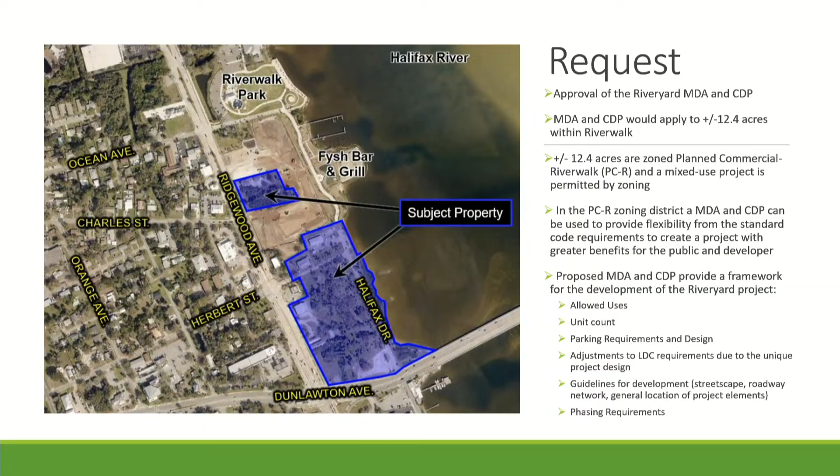What this project outlines in the master development agreement, shown in the concept plan, is a number of components. The main ones are the waterfront trail, a waterfront public park between the road and the Halifax River, up to 30,000 square feet of commercial space in multiple buildings, a multifamily structure, and a parking garage. That parking garage would be wrapped around by the multifamily building to help conceal it from all roadway points of view. Typically with projects you see 2 to 3 sides of an architecturally compatible building, then the back end of a parking garage. In this case, all sides will have screening concealing that parking garage.

There are also proposals for a marina in the future. The MDA outlines these uses, and the concept plan shows a general location for them. As we get to the site plan, there may be slight modifications, but generally those are the locations where we'll find the commercial, the multifamily, and the park.

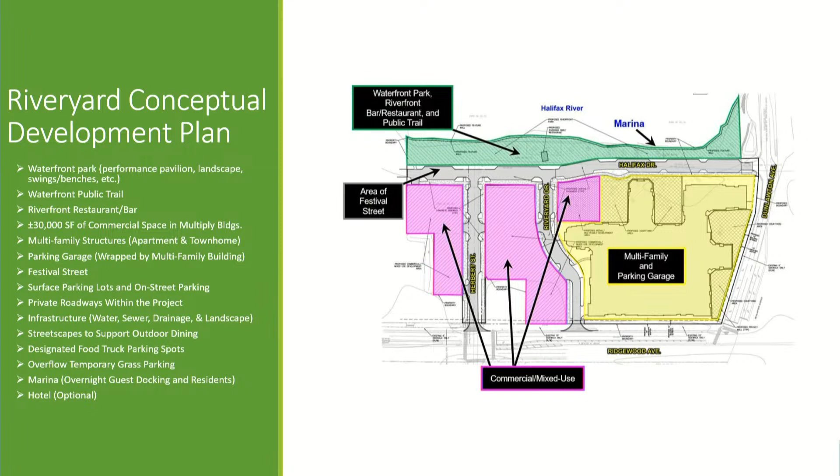It also establishes phasing for this project, as most of our MDAs do. The first phase will consist of about 20,000 square feet of building space to support restaurants and retail uses, plus the necessary parking to support those uses, depending on the square footage provided—that parking could be a combination of surface, garage, and/or street parking. It'll include the private road network of Halifax, Herbert, and what we're calling Riveryard Drive, along with the Festival Street located between the retail buildings.

The Waterfront Park and Trail, a riverfront bar and restaurant identified on the screen right along the river, and the necessary site infrastructure to support those uses—utilities, stormwater, landscape buffer, etc. The agreement also indicates when this phase is due to be completed; the maximum time frame is set at 48 months.

Throughout practicing today, I said 48 days. I told myself I wasn't going to say that, and I screwed up and said it anyway.

So, 48 months from the closing date of the current sales agreement puts it at essentially March 2028. Charles will mention he wants it done a lot quicker than we want it done, so we see that as the maximum time frame, but we'll all be working toward getting it done even sooner.

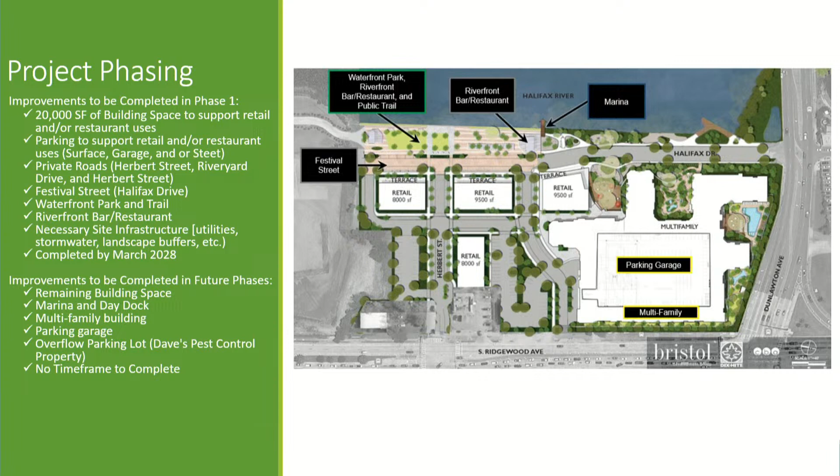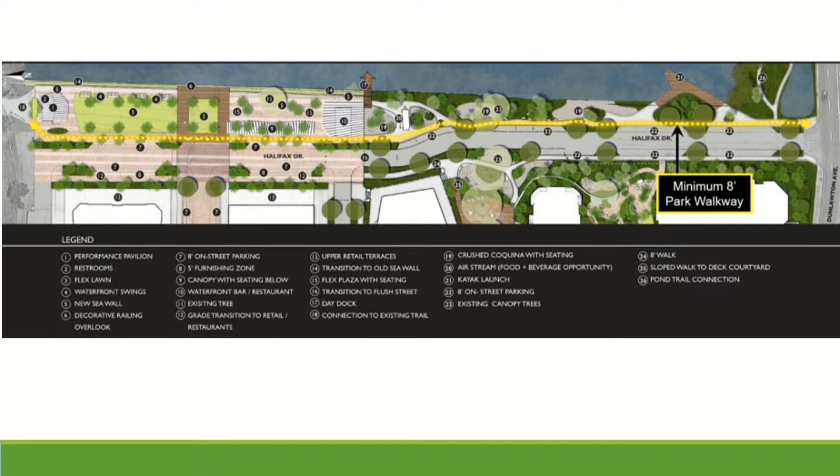Just a close-up of that waterfront park being proposed, essentially between Halifax Drive and the riverfront. It contains the amphitheater, some public space, and the restaurant. It will also continue the trail from where it currently terminates at the property in front of the city rec building all the way to Dunlawton. This creates a pathway so you can travel from Dunlawton Avenue through this project, through where Fysh is located, walk around our park, and loop back around using the 12-foot wide sidewalk on Ridgewood Avenue, completing a walking loop. This is a close-up of that and a lot of the elements initially proposed.

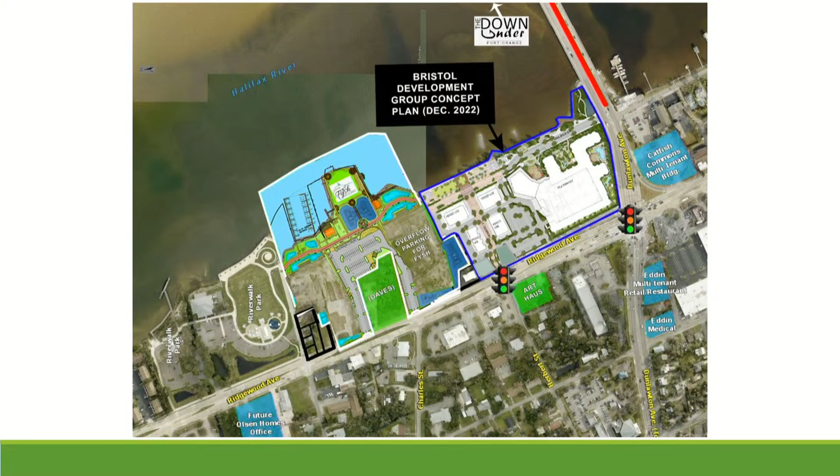This outlines how it fits in with the rest of the area as it's been developed so far. As you can see, it basically forms that linkage across the riverfront for walking, and you can see the overall fit with that area of Riverwalk as we develop it.

As mentioned earlier, there are a few policy considerations. A lot of these are based on the type of project coming before us, and really having to adjust our codes. Our codes for things like landscaping and dimensional requirements are really based off typical development on Dunlawton Avenue and Nova Road. This is more of a mixed-use compact development project, so some of our dimensional and landscaping requirements just don't work in this situation. So we've got some policy considerations in there.

We've added additional requirements or replaced requirements in the MDA. For example, the foundation planting requirements you typically see on buildings along Dunlawton Avenue, masking some of the architecture along the front of the building—for this one, we want to go with streetscapes. We want people to see the architecture of the building and utilize the front space. So while they've deviated from having foundation planting, they've replaced it with a different type of landscape planting more suitable for this type of development.

The staff report outlined the policy issues in 8 categories and went through each one being requested. These are the major ones listed. If anyone has further questions on those policy issues after the presentation, we'd be happy to answer. But staff outlined what the applicant's request was and what the supporting documentation was for those policy considerations.

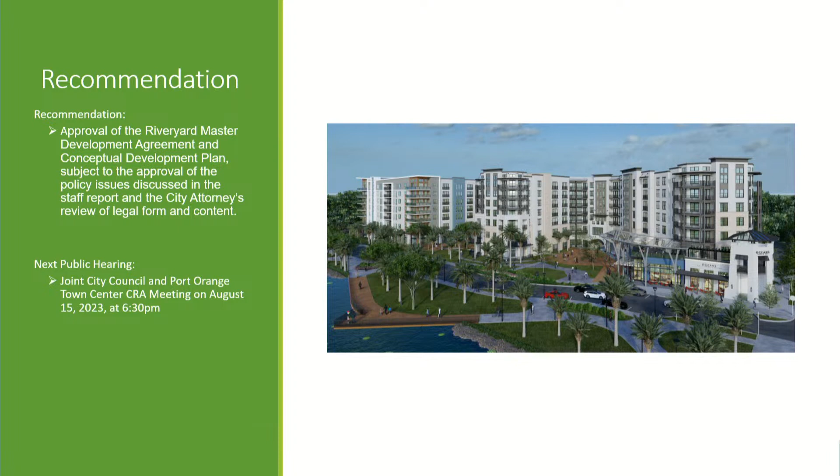You good? Good. All right, thank you.

So we're going to open the floor to Charles and let him come up and do a little presentation for us. You got 2 minutes, all right? Nah, after the 48-day thing. Well, yes, get through in 2 minutes. So just click—hey Tracy, can we get the PowerPoint back on? Which PowerPoint?

There we go. All right. There you go. Just click the mouse to go forward, click these. Okay, all right, thanks. Thank you.

I'm Charles Carlisle with Bristol Development Group, and with us tonight also are representatives from our civil engineers, land planners, landscape architects, and attorneys. If you have technical questions, I would defer to them. This is a really important project to us, I think one of the most interesting and enjoyable we've worked on, and it's also very important to the city of Port Orange and the community. We've put our hearts and soul into this, and we give thanks for your time and energy.

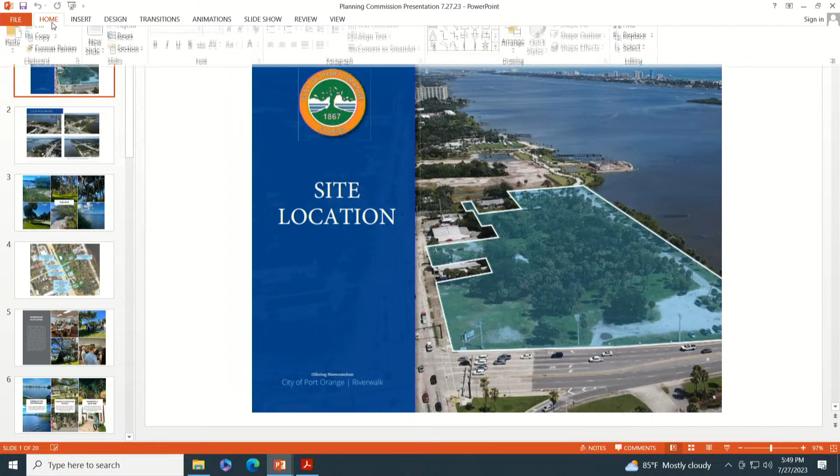Obviously I'm gonna be here longer than my battery's gonna last. So that looks to be the PowerPoint, but it wasn't sliding to the next. Let's just try and see what happens. Here we go, now it's go, okay, perfect. So I'm gonna hide the things, just to fill the screen. I've gotta remember how to start the show. Just do it from current slide. And then should be able to click. It looks like it works with the mouse. Okay, don't go home yet.

These again were part of the inspirations for our streets. This is another copy of the master plan that Tim put up. I want to point out a couple of things. One of the first important decisions we made about the development was to keep Halifax Drive as a public street, so that people could come down to the waterfront, park nearby, and walk to the waterfront.

You've probably seen a lot of waterfront developments done with the buildings that people occupy brought right up to the waterfront, so a limited number of people get a great view and can walk out their back door, but the members of the public are shut out of that. This is the opposite approach, trying to take the waterfront and share it with the public, create an exciting place that the residents also want to be part of, because it is so activated.

Just move the mouse. Oh good, another IT person.

That also created space for this public park, and though we couldn't move this intersection with Dunlawton because of the importance of keeping it where it is, as we went to the north we pulled Halifax Drive back into the property in order to create a wider public park.

That's probably the most important thing we did, keeping Halifax Drive and also keeping the intersection with Herbert and Ridgewood as public streets. That also gives us a lot of parking spaces. There are more than 100 parking spaces on Halifax Drive and Herbert Street in this design.

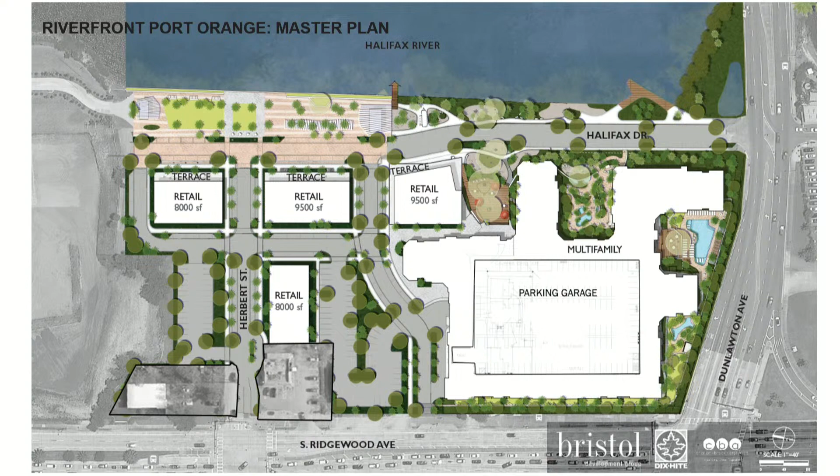The public park, I think Tim did a good job of covering that. You'll see it's broken into almost two halves. The southern half is a more organic and natural setting, where there are opportunities for people to come and sit and enjoy the atmosphere, to fish off the seawall. There's a kayak and stand-up paddleboard launch there.

And so all of those elements work together to create a more natural environment. As you go to the north, this is the active part of the park, where we've got the amphitheater, an outdoor restaurant bar, and a flex lawn that could be used for people to sit on for a music event or set up for an art show or things of that nature. The idea is to activate this through programming regularly, daily small events and regular big events to create an active space.

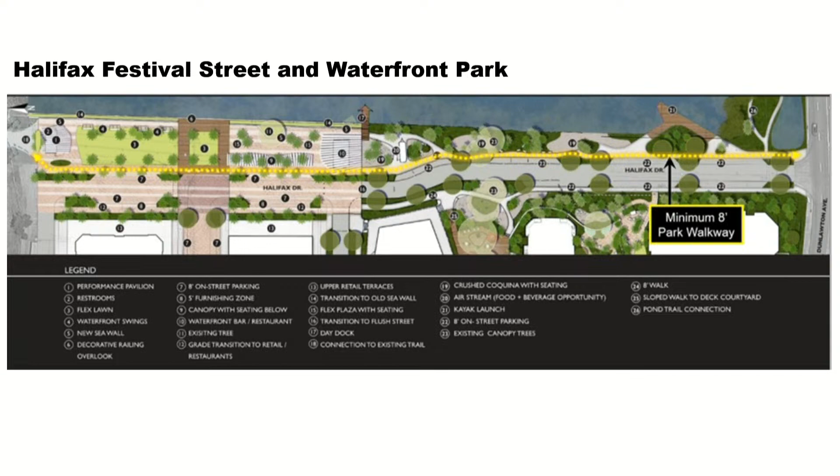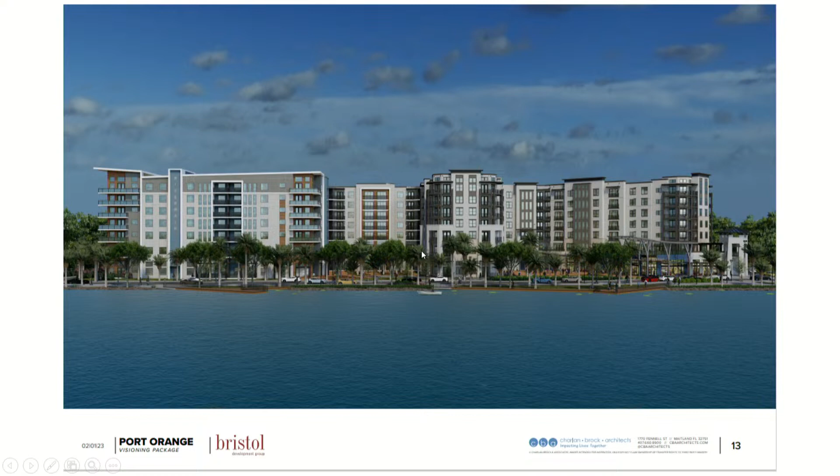When we did that slide, we had not done any architecture. We've now designed the exterior of the apartment building. This is what it looks like, and you can even tell from this vantage how breaking up the plane of the building and creating those movements with the courtyards and little wings makes it a really attractive building.

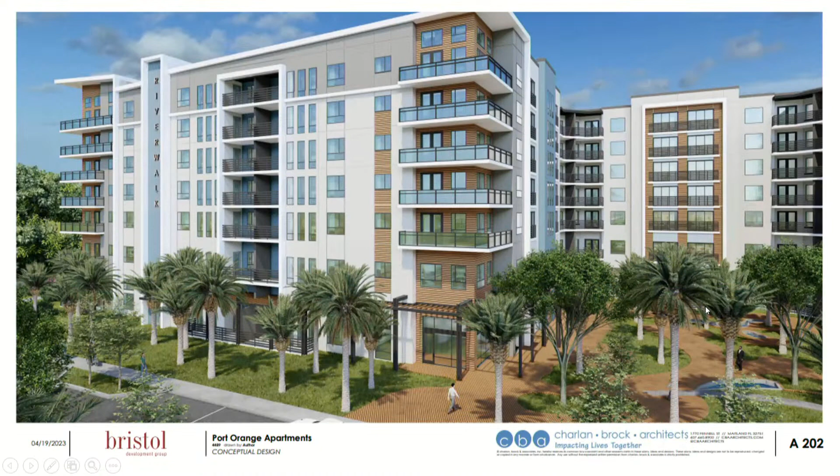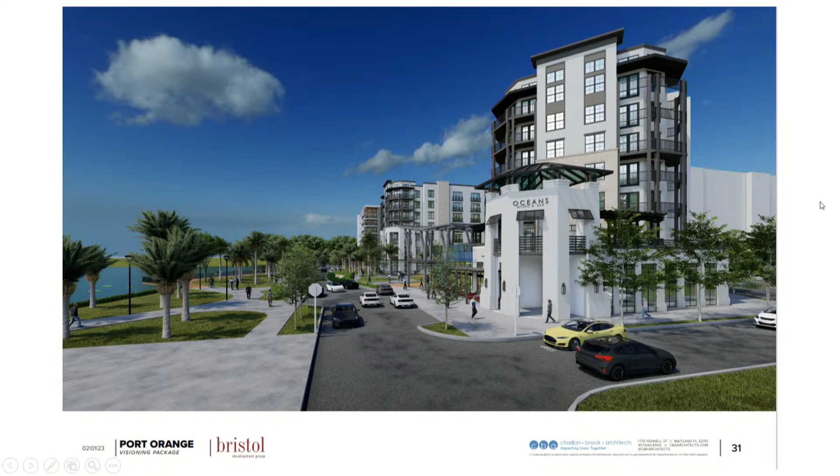We intend to use 3 different architectural styles on the building as it breaks up from one piece to another. This is the wing that's over toward Dunlawton, which is done in modern architecture. The wing over where all the retail is has a more classical, coastal looking architecture. I don't have an image of the one on Ridgewood, but that's contemporary architecture.

This is the corner at Halifax Drive and the street we're calling Riverwalk that goes in front of the parking garage and out to Ridgewood. This is a look back from Halifax Drive toward the parking garage. This little arched opening is the opening into the parking garage. There's 2+ floors of public parking inside the garage, in addition to all the surface spaces outside.

And this is the passageway to come out of there, with retail along the right side here and residential spaces along the side on the apartment building.

Don't know how to go back... that's in December? Yeah, that's in December. Yeah. Oh, there we go. And so, thank you, we look forward to your questions.

Okay, thank you, Charles. Are we gonna come back with you, Tim, or how do we wanna go about this for questions? Do we wanna start with questions of our staff first? Do we have any questions of staff, Stan? That's what I was going with the flow of this, I was marking questions as I read along, but you guys may have different opinions. Let's consider that we're here for the MDA outline, or the general outline of the MDA. We're not here talking about colors and bushes, we're talking about what can go where, in that respect of this MDA, okay?